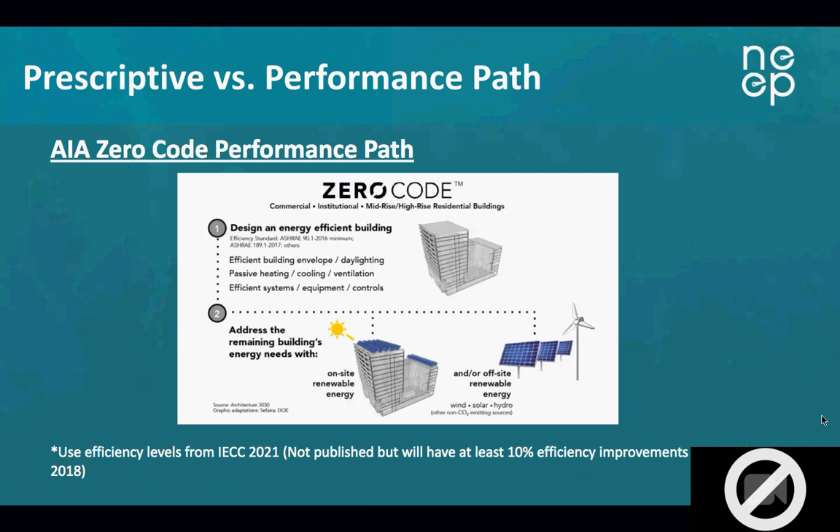The EZ code prescriptive path takes the zero code and goes a lot further, specifically focusing on energy efficiency, electrification, and decarbonization. It takes those IECC 2021 efficiency levels and adds Massachusetts amendments to achieve higher levels of efficiency. It also adds requirements around electrification and decarbonization in order for the building to be 100% combustion free, or zero fossil fuels.

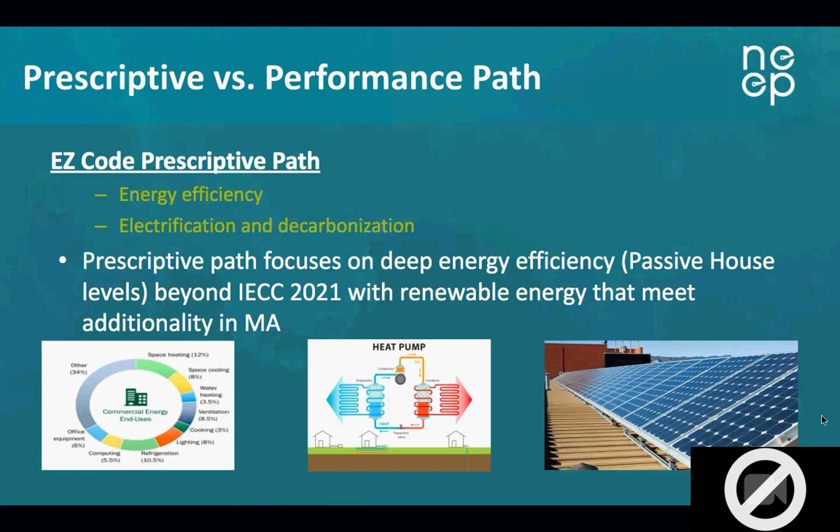Julia Jansky will go into the electrification and decarbonization part of it, and then Cami will talk about the renewables that get added to the building following the energy efficiency and electrification measures within the code.

Just to focus a little on the energy efficiency and load reduction aspect of the code: it focuses on the building's thermal envelope, energy recovery ventilation systems, allowable fan horsepower, heat pump capacity, service water heating equipment performance efficiency, and internal lighting power allowances. These are the sections within the code under the energy efficiency load reduction section.

These areas try to drive down the load of the building and achieve the highest possible levels of efficiency in order to properly size the electrical systems and renewables for the building.

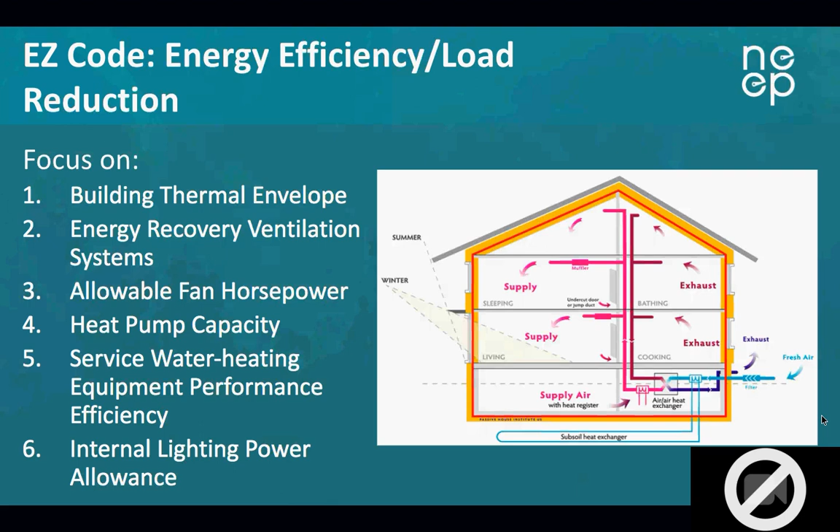The intent of focusing heavily on energy efficiency load reduction is to drive down the load of the building. By doing this, the building is able to take costs into account, and cost is one of the prohibitive factors for a lot of zero energy or net zero buildings getting built. The building achieving these higher levels of energy efficiency allows the electrical systems and renewables put into the building to get to net zero to be sized properly and not be cost burdensome for it to achieve net zero.

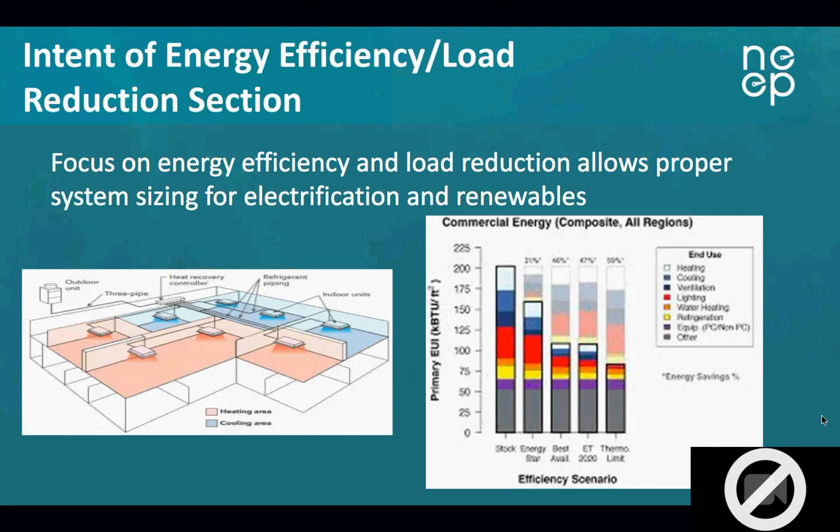So, kind of just a summary of the energy efficiency section. There's the prescriptive path, which takes IECC 2021 plus Massachusetts amendments, and those amendments achieve high levels of efficiency that are around or beyond passive house principles and passive house levels of efficiency. So that's one pathway, and then the performance path is similar to the AIA Zero Code, but there are prescriptive backstops to prevent the building from not being as efficient as possible. So it still follows the AIA code for the performance path, but those prescriptive backstops prevent the building from not achieving similar or higher levels of efficiency.

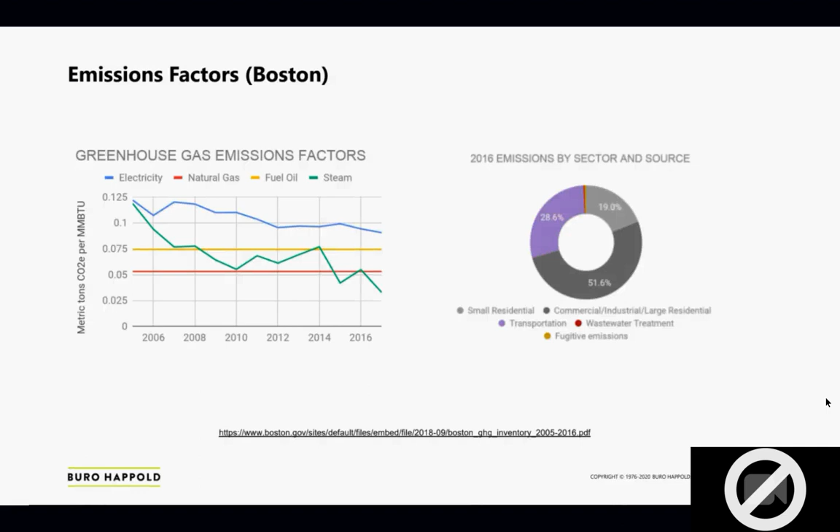On the next slide, I wanted to take a minute and pause here to talk a little bit about some of the common themes or questions or metrics that come up around this question of electrification.

I'll start with greenhouse gas emissions, the purple icon, and then go clockwise. So greenhouse gas emissions we've just talked about. The goal around a net zero code is ultimately to support the Massachusetts 80 by 50 target, as well as the Boston carbon neutral target and lots of other carbon and climate targets that different cities have.

Hopefully the greenhouse gas emissions is clear as an impetus around this question of electrification, to the extent that, moving into the next metric around renewables, the grid does in fact become cleaner. There are more renewables becoming the source of electricity into the grid and less fossil fuels, in addition to the ability for renewables to be placed on site for projects to feed directly into the buildings and back into the grid as well.

Moving over to local utility infrastructure and building peak demand, this is a topic that comes up very frequently. There's a large concern in the industry around the availability of electricity for buildings. So if all buildings are going to become all-electric instead of using gas for heating, for example, there's been some concern around the capacity of the utilities as they stand today and their ability to support an all-electric building.

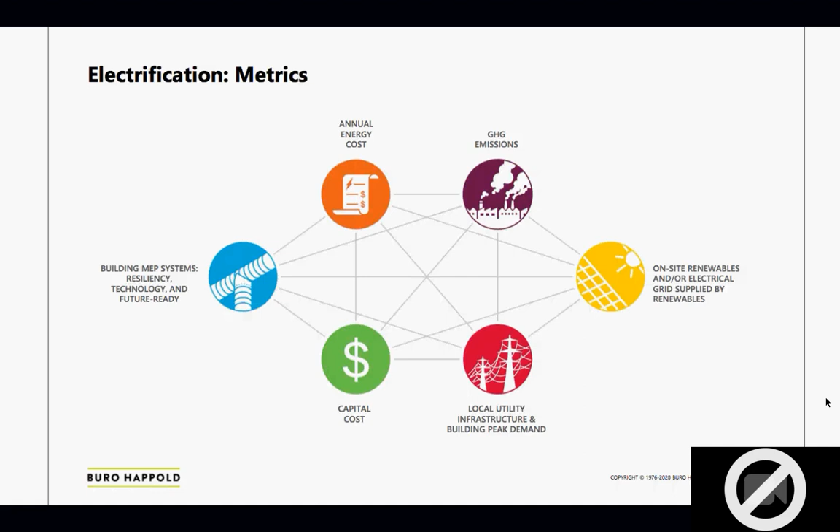I think the next slide, and this is the last slide, is what the outline is for this section within the net zero code draft. So the objective, which supports the overall objective that Rebecca presented at the beginning, is to align to a cleaner electrical grid in order to optimize greenhouse gas emissions reductions.

The vision has 5 key points to it. One is to eliminate on-site combustion for thermal energy, i.e. heating and hot water, which we've talked about. Number 2, to consider exemptions for specific building types, systems, and circumstances—one example is emergency and standby power, another might be where it's contrary to core business operations, for example industrial processes that require fossil fuels. Number 3, require electrical vehicle charging infrastructure, so in the code today there's a component of having a PV, a solar photovoltaic ready building, and in this case we're proposing an EV, electrical vehicle ready requirement.

Hey, Julie, I think we just lost you.

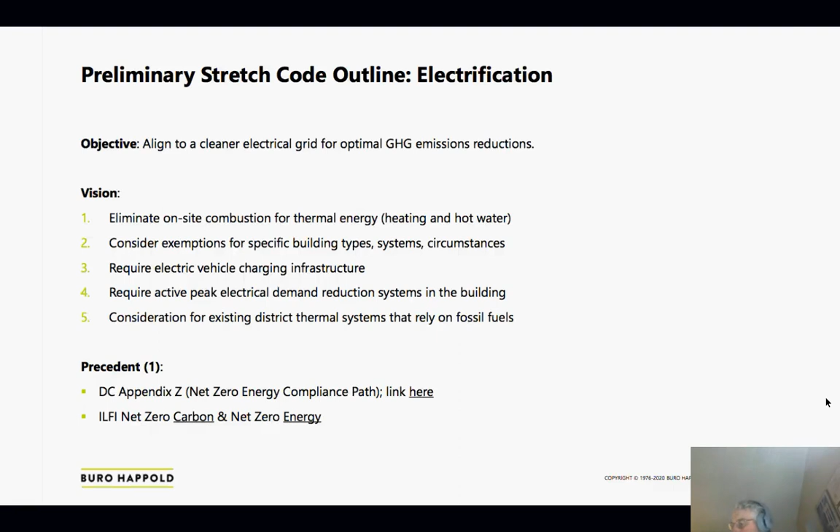Okay, Julie, I think we might have to just return to you in a couple minutes if you're able to regain access to audio. We don't know what's happening with our conference call line tonight, it seems like things are a little funky. But I think in the meantime, Cami, are you able to unmute yourself? Cami?

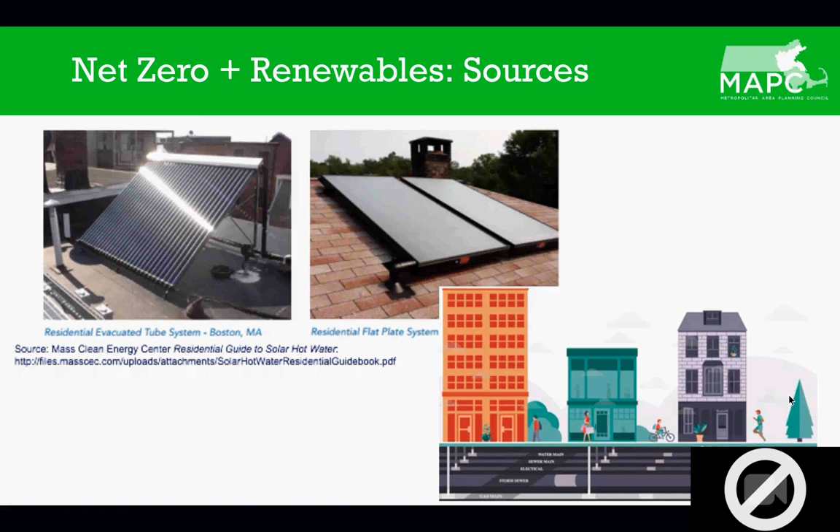Just because, and I think I hear some sound, if folks can mute themselves, that'd be great. For the town of Watertown, some of you might be familiar with that zoning ordinance, and the language here is going to be relatively similar to that. Sorry, folks, I'm still hearing a lot of background noise. If you wouldn't mind muting, that would be great. Or I hear myself being repeated.

Wonderful, thank you. So just as a point of connection, the language we're looking to have in here on the rooftop solar mandate would be similar to those who are familiar with the Watertown zoning ordinance. Obviously, that's in local zoning as opposed to statewide building code, so not exactly the same, but very similar. Really looking, again, to prioritize that rooftop solar and the on-site renewables.

If a building owner were to show that they have another type of renewable energy on-site that can meet part of its load, then the rooftop solar requirement would not be as much. And obviously there are exemptions if your site cannot support that type of solar, but it's something we really wanted to prioritize. And with that, Rebecca, you can go on to my last slide, which is just my contact information, and happy to talk more about this. Thank you so much.